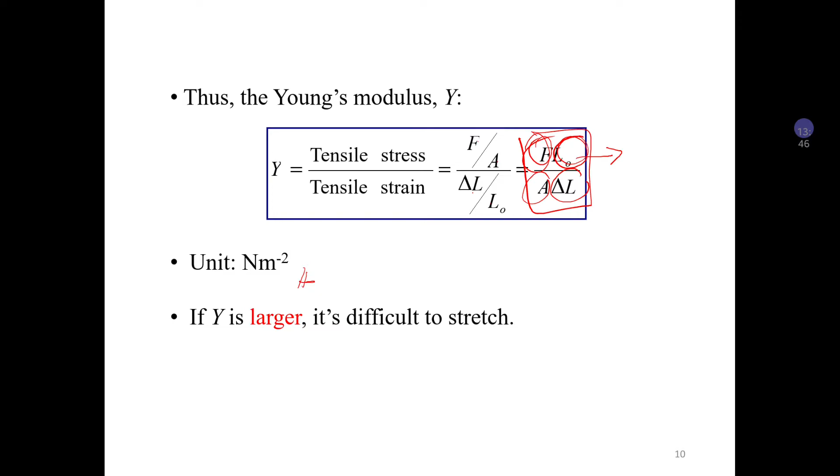Okay, so now we look at the example 6.1. A 15 cm long tendon was found to stretch 3.7 mm by a force of 13.4 Newton. The tendon was approximately round with an average diameter of 8.5 mm. Calculate the Young modulus of this tendon. So dia tanya berapa the value of Young modulus.

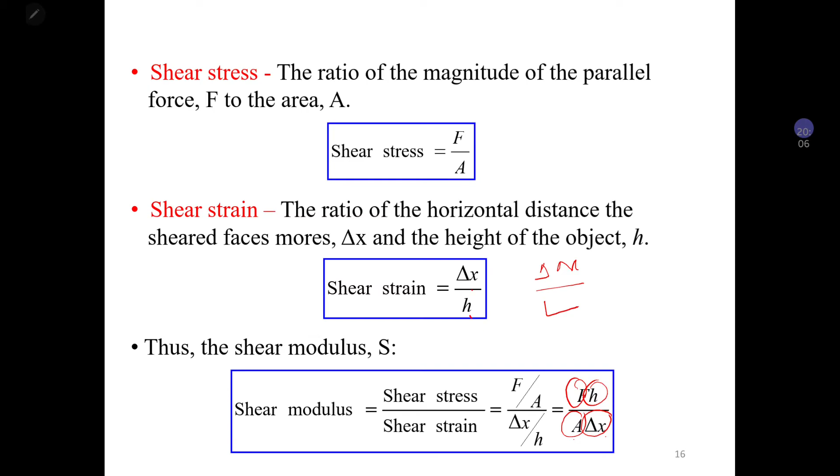Exercise 6.2. The upper surface of a cube of gelatin 5 cm on the side is displaced by 0.64. So this is the value of delta X, by a tangential force. If the shear modulus of the gelatin is, so this is the value of shear modulus. What is the magnitude of the tangential force?

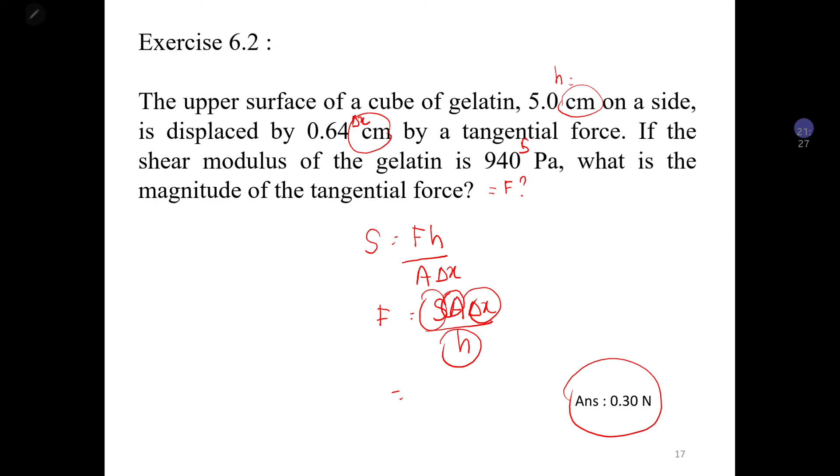So you should get the value of F is equal to 0.3 Newton. So jangan lupa tukar unit. So this one you need to convert to meter. This one you need to convert to meter.

Okay, lastly is about the bulk modulus. Bulk modulus measures the resistance that solids and liquids offer to having their volume changed, which means that berlaku perubahan isi padu. So apabila satu objek tu dia squeeze, dia akan berlaku perubahan isi padu ataupun volume.

So a body subject to this kind of deformation undergoes a change in volume but no change in shape. So we calculate the value of stress by delta F divide by A, which is force divided by area. Okay, so we know also that F over A adalah sama dengan pressure, kan? So bila kita squeeze, actually we give them the pressure. And then strain is change of volume divided by the original volume.

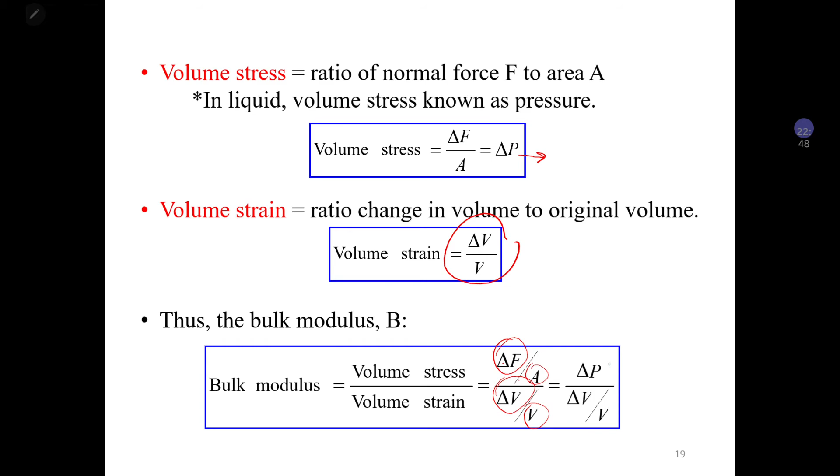So for bulk modulus we can use the equation of delta F divide by A, change of force divide by A, divide by delta V over V, or pressure divide by delta V over V.

Okay, so exercise 6.3. An anchor made of cast iron of bulk modulus, so they give the value of bulk modulus, and the volume is 0.23. Okay, and then they give the value of pressure; find the change in volume. So we know that bulk modulus is equal to delta P divided by delta V over V. So we need to find the change in volume. So rearrange: delta V adalah bersamaan dengan delta P V divide by bulk modulus. So you can get the value is negative 6.71.

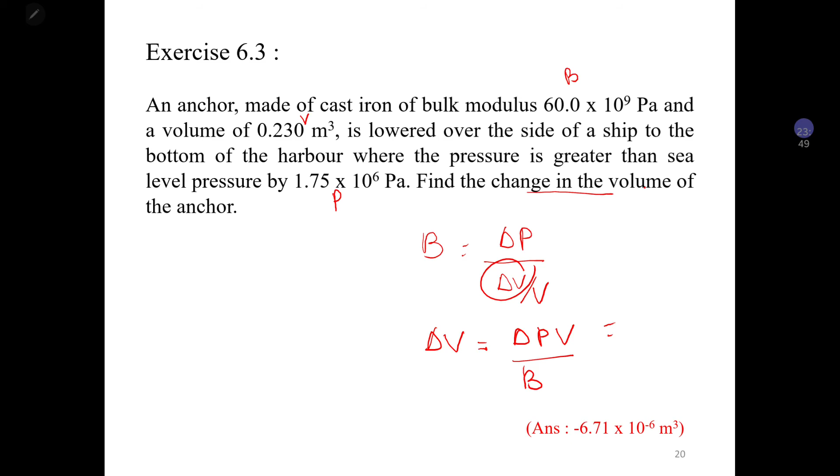Okay, last one I want to show you is the Poisson ratio. Poisson ratio is the ratio of the relative contraction strain normal to the applied load to the relative extension strain in the direction of the applied load. Tensile deformation is considered positive and compressive deformation is considered negative.

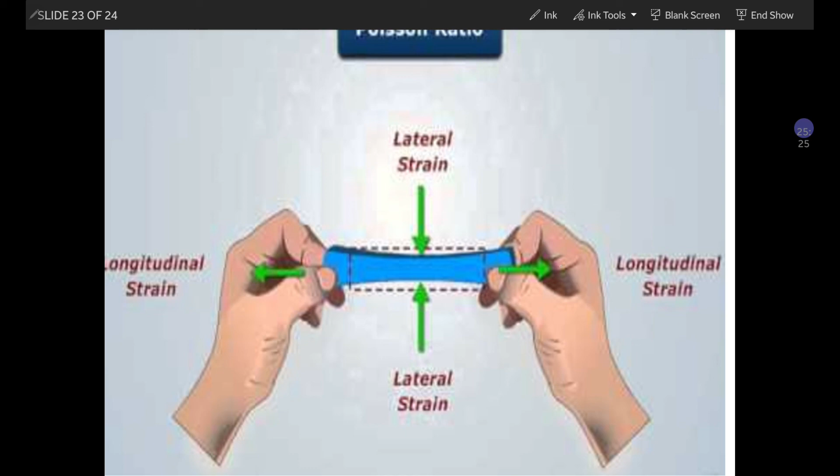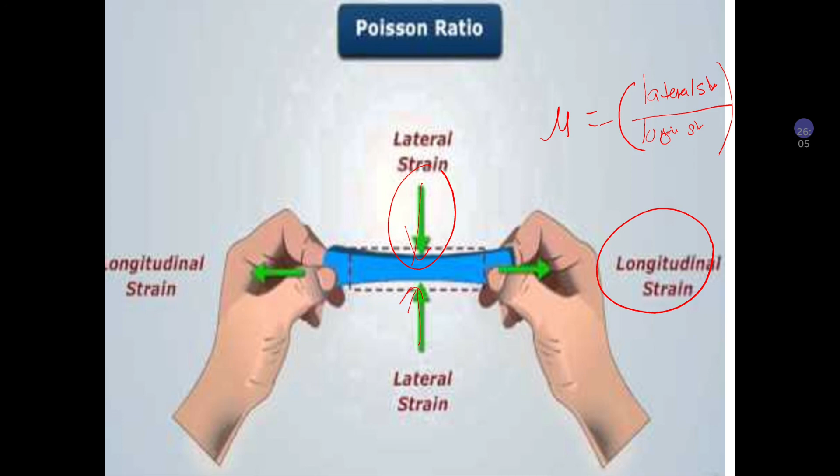Betul? Okay, mengecil. So Poisson ratio explains lateral strain, which is strain yang kena kat sini, divide dengan longitudinal strain, which is strain dekat sini yang kita tarik. So that's the equation of the Poisson ratio. The strain lateral divide dengan strain longitudinal. So that we call a Poisson ratio.

So for example, when a sample of material is stretched in one direction, it tends to get thinner in the other two directions. So the stretch kat sini, tapi kat sini yang akan jadi thinner, dia akan mengecil. Yang tempat lain dia akan memanjang.

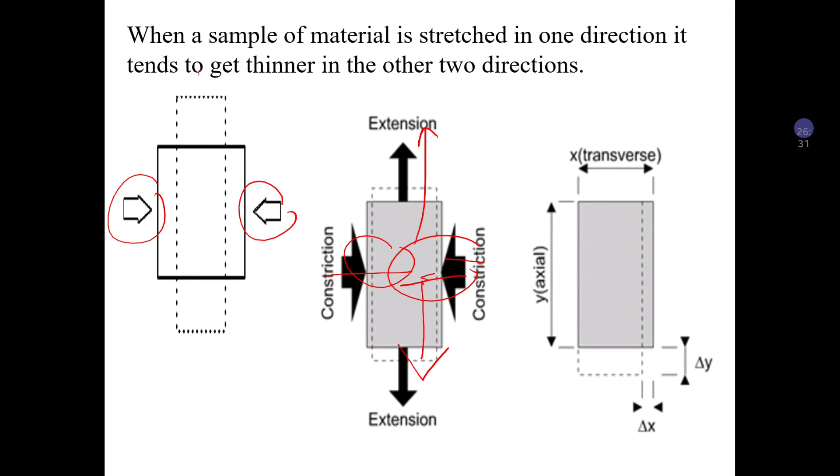Alright, clear? So I think that's all for chapter 6 about elasticity. So next we are going to learn chapter 7, which is thermal expansion of matter.